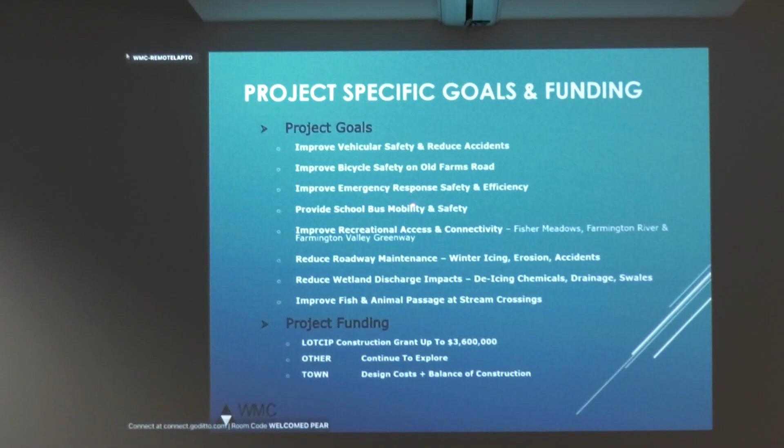But the goals to address those things: obviously we want to improve vehicular safety, reduce accidents is an important part, improve bicycle safety also - that's a concern that's been raised throughout the region as well as the town. Improve emergency response safety, time, and efficiency, and provide school bus mobility and safety.

We also want to provide - one of the major goals here is to provide connectivity and access from Fisher Meadows, the Farmington River area, to the Farmington Valley Greenway, up off of Thompson Road. So that's a primary goal as well.

We want to reduce winter maintenance. We want to reduce wetland discharge impacts, as I talked about. We also want to improve fish and animal passage into stream crossings.

Project funding - Larry mentioned one of the major fundings is we're getting LOTCIP funding from the state of Connecticut for $3.6 million. We're continuing to look at other federal and state funding that might be available, and also the town would have to probably throw in some as well.

Can you go back to the same slide as before? So let's talk about the project.

The goal of the project was for safety—none of these other goals. It's not just for safety. That's what you told us at the first meeting. I haven't been to any other meetings. Well, that's not our problem. This is a kickoff meeting, we're just starting the project.

This is not a kickoff meeting, this is a continuation meeting from the first part, which did the other half of the project, which was told to us that the tree reduction would be minor, that the roads would be changed, and that's not what's happened here. And I don't believe anything you're going to say is going to happen on the other half, when the first half is a horrible mess.

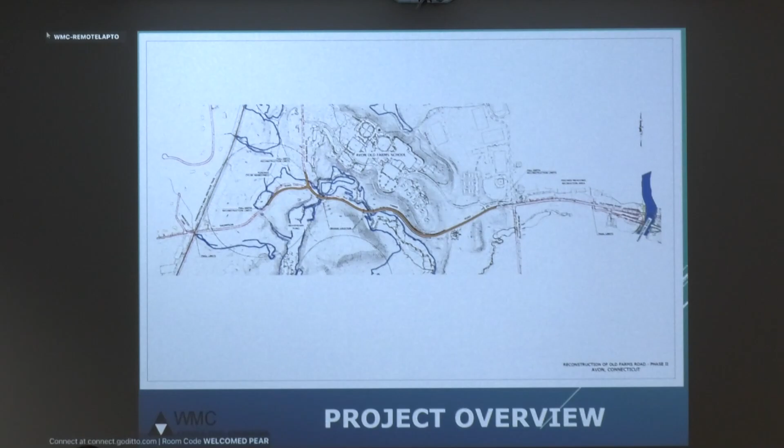There's about 3,000, almost 4,000 feet of Old Farms Road we're going to totally reconstruct. Thompson Road is about 800 feet. There's a fair amount of trail—it's going to run 2,000 feet on Thompson Road, and then 5,300 feet down Old Farms Road.

Existing right now, the posted speed is 25 miles per hour. In reality, safe running speed is less than that. The road width is 18 feet, which is 9-foot lanes, and there is no shoulder at all, no bike lane. There are many places where the vertical and horizontal sight lines are even less than the posted design speed, and all of you that drive it know that.

So there's no bike lane now, and there's no walkway. We're proposing posted speed stays the same, but a safe vehicle run speed of 35 miles per hour, which would be a total of 28 feet: 2 10-foot lanes and 2 4-foot bike lanes on either side.

The sight line and vertical and horizontal geometry will be designed to 40 miles per hour because we want to get good visibility both vertically and horizontally. And again, we're going to add 4-foot lanes for the bike, and there's going to be an 8-foot trail running all along the south side.

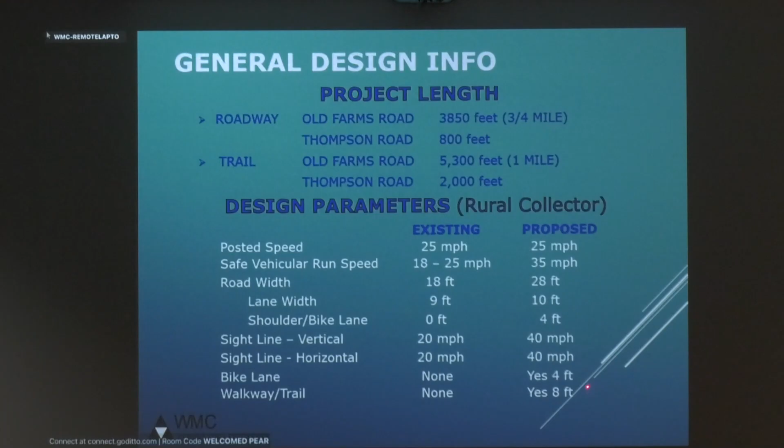Starting out again, this is Thompson Road right here—this direction goes up towards 44, and this is Old Farms Road right here. On Thompson Road itself, what I'm going to do now is show you, again, this is the existing road, and show you some of the areas of concern that we've identified, that we're going to try to address with geometric improvements.

So there's a sightline issue of concern here, horizontal, right on Thompson Road. There's also an intersection issue. That's why we're going to realign the intersection so people will be lined up better with Old Farms Road, so the passage will be more Old Farms Road rather than the confusing arrangement that's there now.

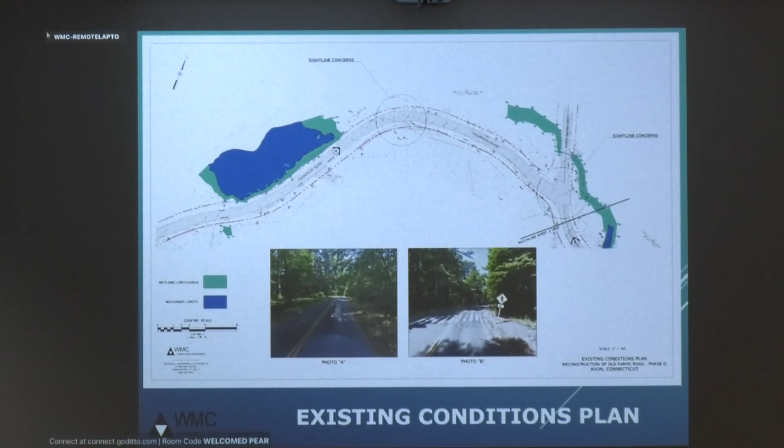So there's about 8 of these areas as we go through. Continuing along the road, there's a sightline concern right in this area as we come down from Thompson Road. This bridge here, the first bridge, also is a concern width-wise, as I talked about earlier.

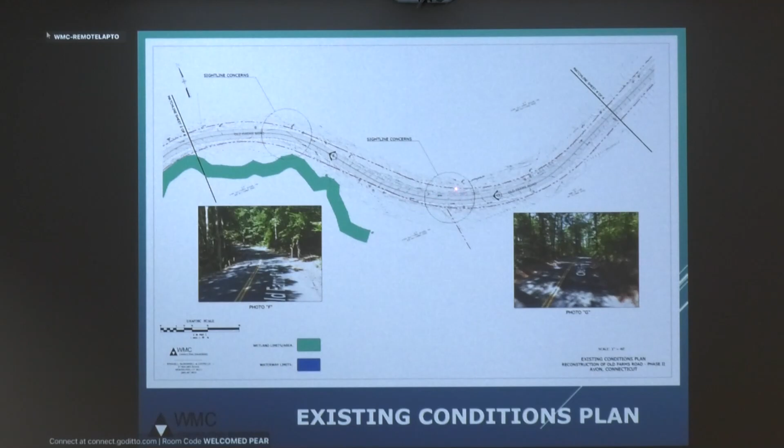As you continue on down off the page, there's another area with geometric, horizontal sightline issues, and another here. Continue on down, there's a third down here where the intersection for the school with their driveway access is, and then we terminate the project down at Tillotson Road as far as road reconstruction. The trail is going to continue all the way down to the river pretty much.

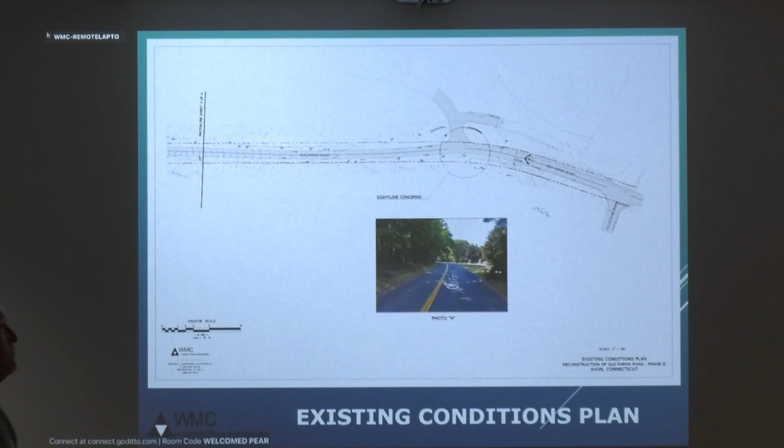What's that intersection there? That's the driveway going into the school. So that's basically the areas of concern we particularly noticed as we went through the project and got the plan set up, looked at the existing geometry and so forth. Those are areas we're going to try to address.

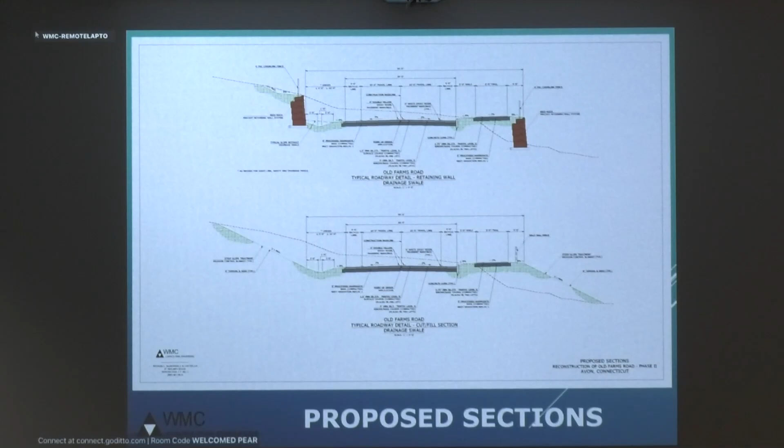Go to the actual presentation. I understand. Reloading, I have to reload it because it got frozen on that first screen. Pick the slide.

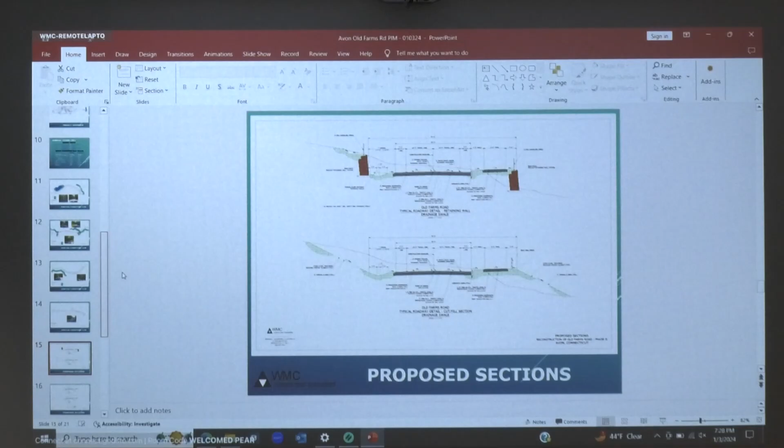So now, that's Old Farms. There's Thompson Road. Thompson Road's similar. Again, the trail is on one side because we're going to connect the trail all the way up to the existing trail.

Again, this would be a typical fill section. This would be a typical cut section. And then there's also sections where on Old Farms Road, we're leaving the existing road in place and just building the trail. There's 2,000 feet of that. So that's typical sections for those.

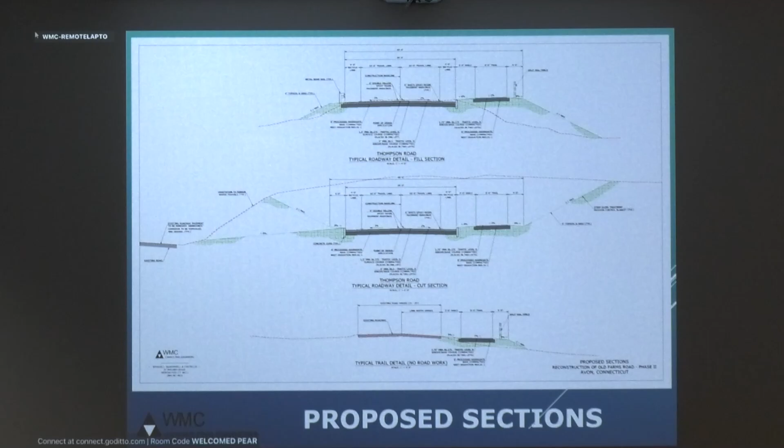Also the culverts. Again, we want to carry the road and the trail over the stream, so we're widening, lengthening and totally replacing those. We'll also be adding stream bed material down in the stream bed, and we're going to widen those out because we want to provide access through those culverts for smaller animals that really can't make it through the existing ones right now.

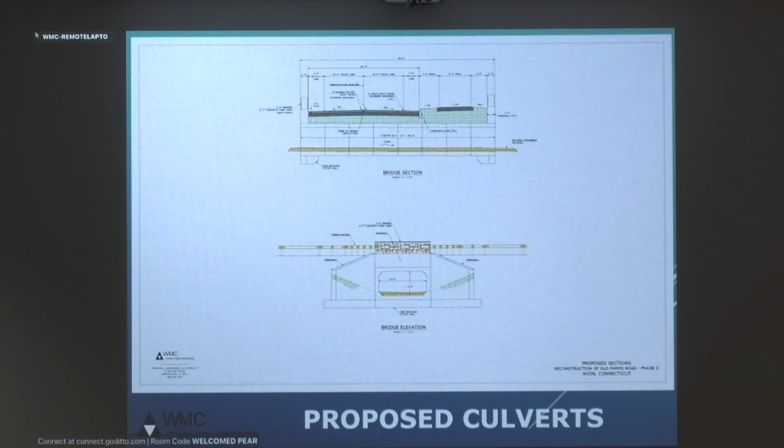So, anticipated schedule. Well, this is where we are right now. We're really just going through very preliminary information, trying to get some input, and then we're going to start design. We hope to have something to present in terms of design itself in April, at which point we would have another public input meeting. Then we would go into final design and referendums and so forth. We would anticipate doing that probably in late 2024, early 2025.

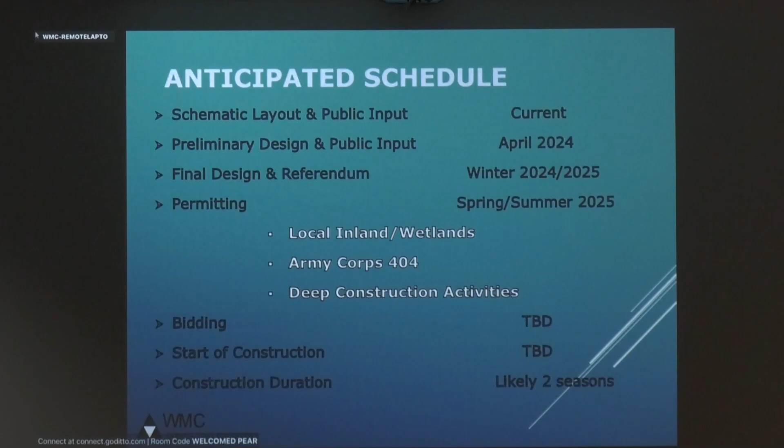And then we would dive into permitting in the summer, hopefully. These are the kind of permits we're looking at typically. And then, depending on how long the permitting takes, we would do bidding and start construction maybe towards the end of 2025. It's likely going to be a couple of seasons, just because of the difficulties of the curvatures and trying to maintain traffic and the school and things like that. So I think we're looking at a couple of seasons.

So I guess what I'd like to do is if there's a sign-up sheet, I'd like to call on the people. If you would, please announce your name and your address before you ask your question. We can pass it around if you like. Jake, we can pass it out. Let's see, let us have the first. You want to just call them out? Yeah, yeah, they're just going to raise their hands. So, why don't we start? This gentleman, let's start with the young lady right here first. Thank you.

My name is Helen Desidue. I live on Winding Lane, right down here. Signage, I didn't see anything about signage. I think a simple solution to all of this would have been better signage, no trucks, no commercial vehicles over a certain size that are trying to get through these roads and cause accidents. I would like to see more signage. Right here, this intersection on Burnham and Country Club, many accidents, I'm sure you knew, for years, until they put 2 more stop signs and made it a 4-way stop, and there's never any more accidents. So I would please consider that. Absolutely, yep, that's a good point.